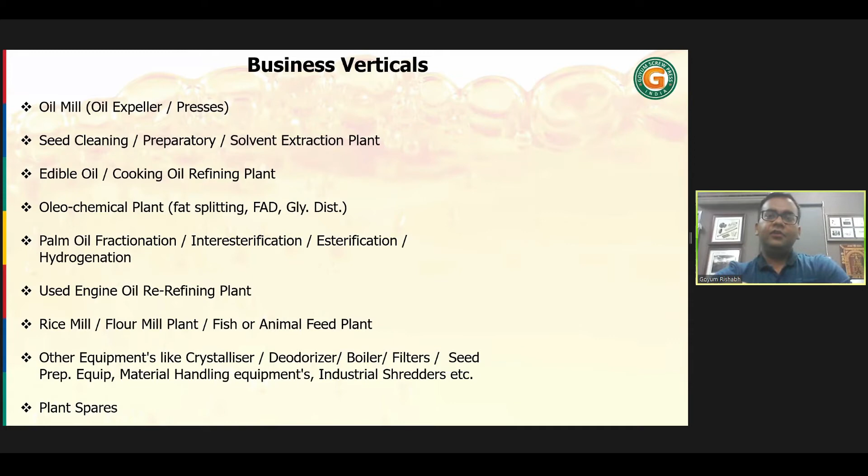Now moving on to the soybean oil extraction process particularly. This is some detailed literature on soybean. It is, as we all know, the oldest cultivated plant in the world, and people have been using it for 4,000 years. It's a high value material for animal feed and for human food production. It contains 42% protein and 25% oil.

Soya needs special processing. Most companies in India are good at processing cottonseed oil, sunflower, or groundnut. But soya needs special processing, the reason being it has anti-nutrients.

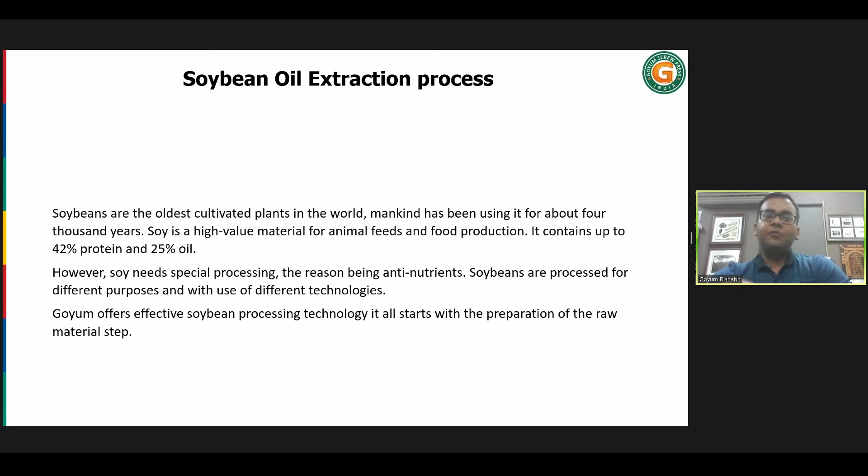Soybeans are processed for different purposes and with use of different equipment. Goyum from India offers effective solutions for soybean processing, and it all starts with the preparation of raw material. So moving on to the process, soybean dehulling.

We provide soybean dehullers. The cleaned soybeans, which are removed from any kind of impurities and dried up to 8% levels, are fed into the dehullers. Here, soybeans are compressed between the first pair of rollers, and as a result, the shells burst and the soya kernels break up into several parts.

The mixture of soya kernels and hulls moves to the transportation system and air separator. Soya shells are lighter in specific weight, so when the airflow moves, the husk moves up and passes through the cyclone. This process reduces the amount of fiber and increases the fraction of protein mass and improves the oil yield. The soybean kernels are then discharged from the air separator and fed into the extruder. Dehulling is done to increase the protein content in the oiled cake, also known as de-oiled cake (DOC).

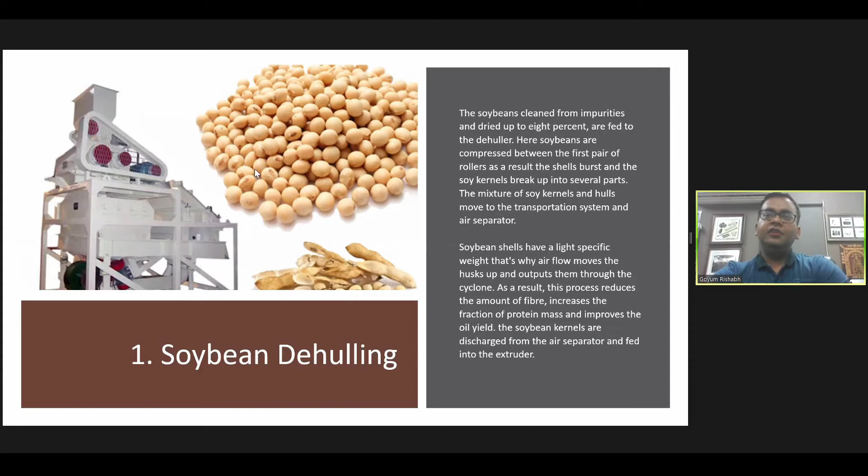After the dehulling process, the processed soya is then put into the extruder. We are one of the few companies in India which produce a complete soybean processing line. We make dehullers, extruders, presses, and the cake cooler as well. I'll explain in detail about the other two equipment.

After the soybean is processed from the dehuller, it goes to the extruder. The feedstock is conveyed forward by the screw inside the extruder barrel. Due to the high shear, it is then compressed, mixed, and heated. The soya is processed in less than 30 seconds under great pressure and high temperature.

Any harmful substances present are destroyed in this process, as the temperature inside the chamber or barrel is 130 to 140 degrees Celsius. At the same time, protein and fat do not lose their properties due to the short cooking time of the product. Our extruders are based on the dry extrusion method.

The heat is developed by friction, and what we have now is a full fat soy meal with the help of a screw feeder. Then this feed is fed into the mechanical oil press.

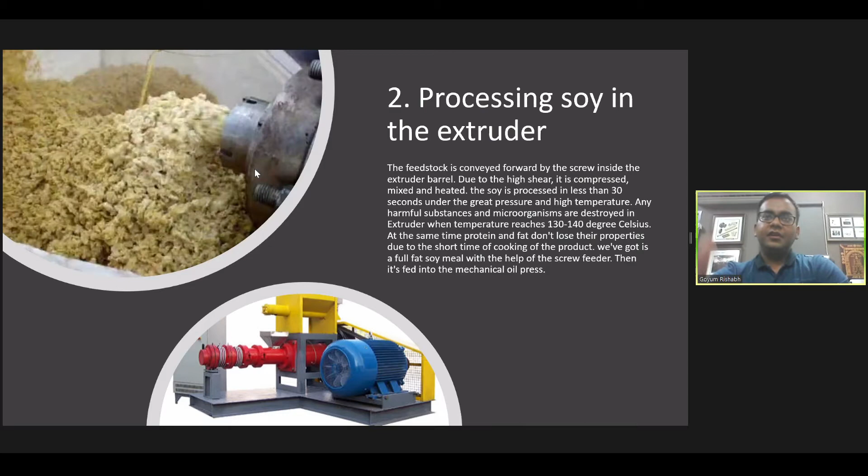I would like to particularly focus that our machines are probably the only company machines from India, or you can say Southeast Asia, which can process soybean and give world-class results acceptable for the world market. Our machines are performing very well in India as well as in sub-Saharan Africa.

So the mechanical oil extraction in the oil process is the third point. The full fat soya meal is moved along the press cage and is squeezed and pressed. Due to this high pressure, the oil seeps out through the press cage gaps and is gathered into the oil reservoir below. What we get is a pressed cake with an oil content of about 6 to 6.5% and a temperature ranging between 110 to 120 degrees Celsius.

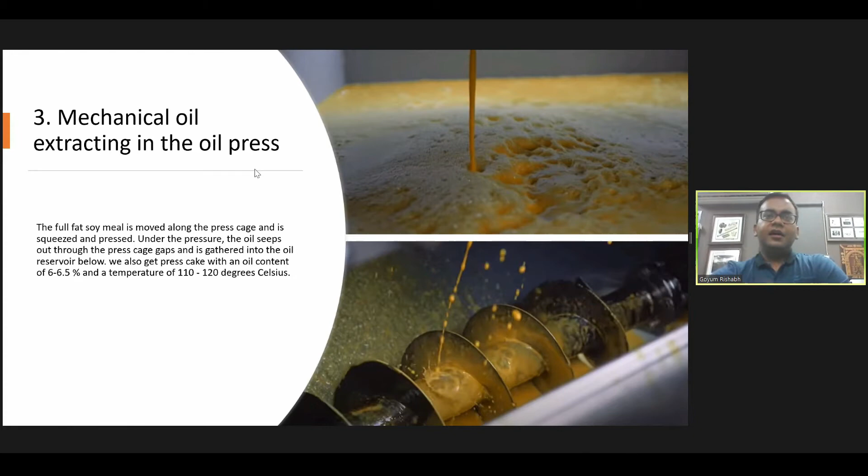So what we have done after extrusion is extracted the edible soya oil present in the soybeans, and got soybean oil cake. After this process, the cooling of the oil cake is an important part.

I want to point out that the trypsin inhibitors are already removed by the extrusion, so there is no need for heating by the dry extrusion. Whereas in case of other oil pressing, like groundnut or sunflower, you need to provide steam before you press the oil seed.

It can't be packed as it is, as the temperature of the oil cake is about 110 to 120 degrees Celsius. So the oil cake, after passing from the hammer mill, is fed into the cooler.

The cooler tumbler rotates and stirs the oil cake down to the discharge section. The fan creates a flow of air through the soya oil cake. Heat exchange occurs between the cold air and the hot soya oil cake. After the cake has been discharged in the cooler, its temperature is roughly 40 to 50 degrees Celsius lower than the temperature it had at the time of feeding.

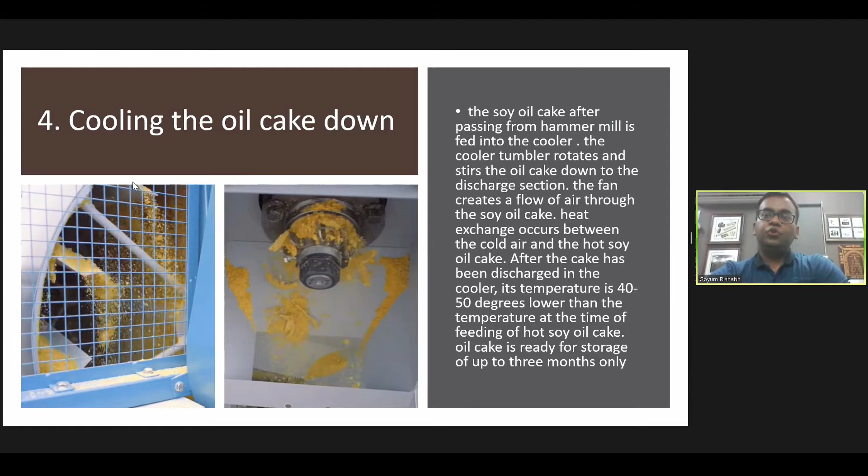So the oil cake, having its temperature at least 40 degrees lower than its feeding temperature, can be stored. Online cooling is also required, for online bagging so that stacking can be done.

So these are the four basic steps which can get the perfect ingredient to be used in the feed industry. Only mechanical pressing can get oil, high protein, and soya cake. In conclusion, let me remind you that high temperature and short time cooking is the key to successful soybean processing. Using our technology, it's available and it's a reliable technology.

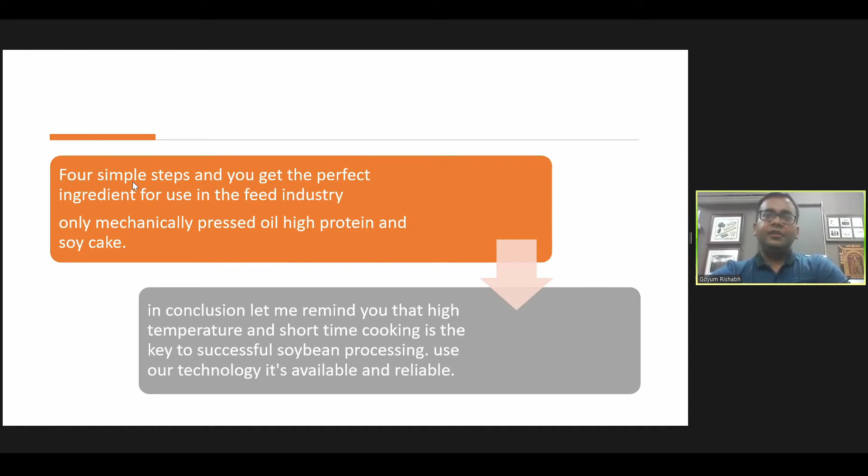So particularly talking about our experience in sub-Saharan Africa, we started our journey in year 2000 from Uganda. In terms of exports, we have been exporting for 20 years now. This is the 20th year of export of our company. So we have had a great experience in sub-Saharan Africa for two decades now. We started with Uganda in 2000, and then subsequently we ventured into Tanzania, Zambia, and Mozambique.

And most of the projects, I remind you, about 30 to 40% of the projects are based on soybean, and the project capacities are not of major scale like 200 tons or 500 tons per day. They are basically medium scale capacities, 50 tons per day or 100 tons per day maximum.

So we're working in all the East Africa region of Tanzania, Zambia, and Mozambique. In North Africa also, we have done turnkey projects in Sudan, Ethiopia, Egypt. In West Africa, we have been working in Burkina Faso, Mali, Senegal, Ivory Coast, Nigeria.

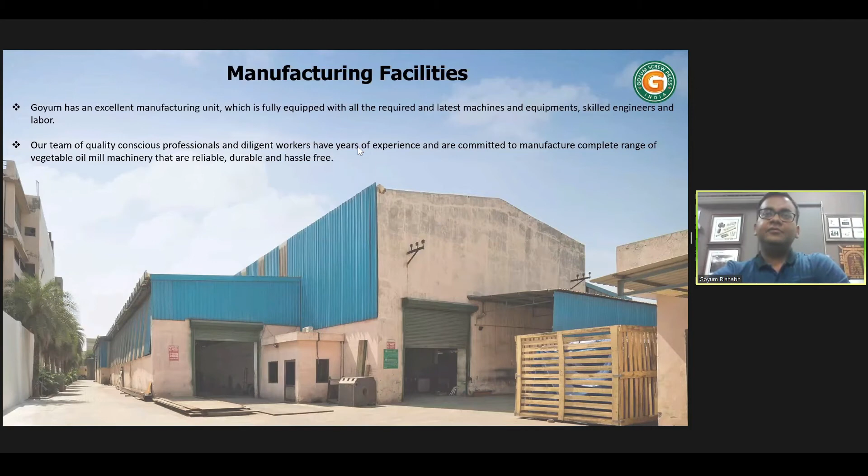So we have a skilled team of engineers who are dedicated to provide good quality equipment, and we have long experience. So the experience helps us to market our product and to provide good after sales service to our customers as well. So these are a few glimpses of our manufacturing facility, which we do here in India.

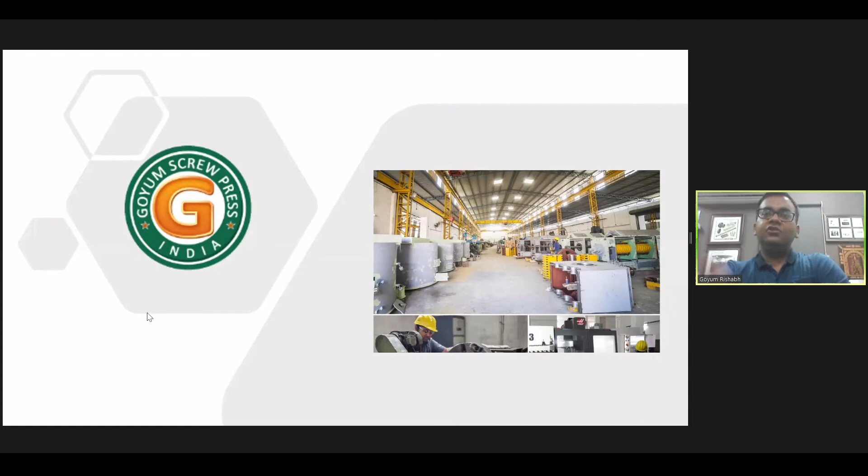These presses on your right of the screen are all for soybean processing. They can work on soybean, sunflower, groundnut, cottonseed, multi-seeds, and palm kernel as well.

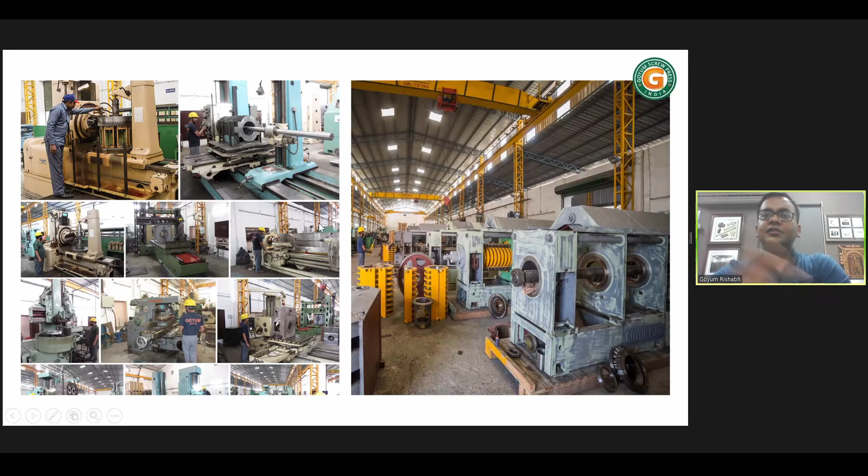These are the manufacturing facility we have. These equipment are for a solvent extraction plant, which we are now doing in Mali. A project—we have grabbed an order from Mali for Shea and soybean. Also, there is a project.

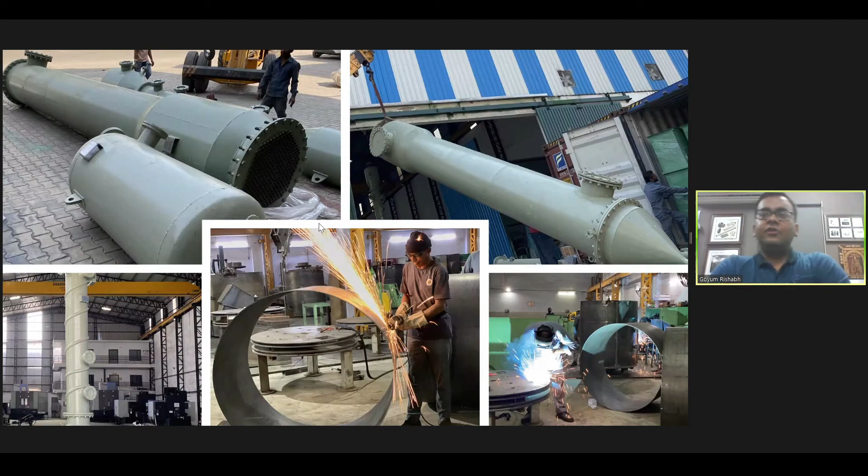These equipments are also for soybean, so refinery and solvent, which we are doing in Kano now for Nigeria. So there's a growing demand in North Africa as well as Western Africa.

Sub-Saharan Africa—my personal point is that due to this COVID-19 pandemic, more and more economies, more and more businessmen are now focusing on self-sufficiency rather than being dependent on imports. More and more businessmen and governments are focusing on how they can make themselves self-sustainable.

So we are now getting inquiries from people who were earlier importing soybean oil or sunflower oil from Ukraine, Brazil, or Argentina, and now they're looking into venturing and putting their own factories for edible oil processing. So at least one good thing I can say from the COVID-19 pandemic is that businessmen are thinking inwards, trying to integrate themselves rather than being dependent on imports.

That's why we feel companies like ours have a good opportunity to work in sub-Saharan Africa. We have a long experience there. We have a good team of professionals there who are working tirelessly, and that helps us to market our equipments as well.

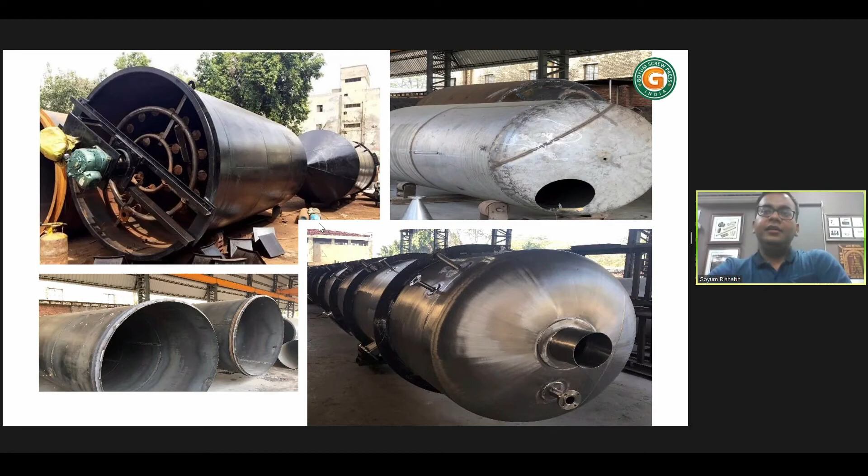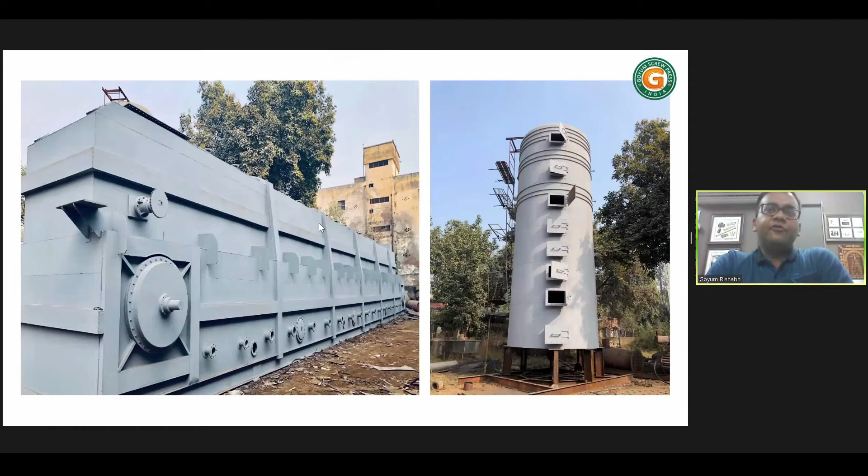These are again some photographs of our equipment getting ready in our factory. These are some of the technological highlights, and we focus on providing maximum efficiency.

Luckily we are in Punjab, and we do not have any labor issues or any kind of these issues, which allows us to work full time, 24 hours a day. We are working in double shift, 7 days a week. So we are quite efficient, which helps us to provide all the equipments in a stipulated time.

What happens in sub-Saharan Africa particularly is delays happen because of bureaucracy and red tape. To counter that, we have a hugely efficient team in India who make sure that whatever we commit to our customers in Africa, we deliver on time.

Our equipments also consume lesser electricity, so the utility consumption is reduced, and they provide better performance on the reduced utility. Our process costs are also reduced because of this, and we are using advanced technology, which helps us reduce the downtime as well.

I would like to give you an example: if a competitor company is selling a machine in sub-Saharan Africa, the shelf life of the parts is like 1,000 hours, whereas in our case, the same part lasts for 5,000 hours. So you're looking at 5 times more time limit. You can run the machine for 5,000 hours without any stoppage or breakdown, and it reduces your downtime and increases your productivity.

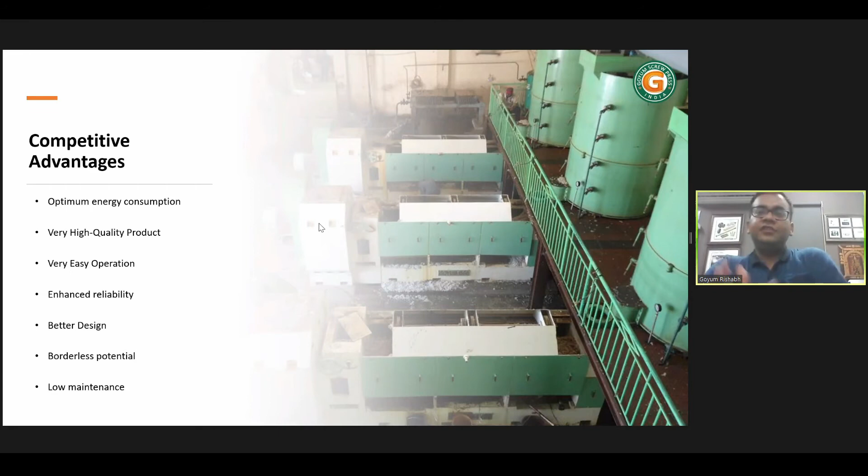These are the photographs of some of the projects we have done. As you know, India is also a huge soybean producing state, so we have done a complete soybean edible oil extraction plant of 400 tons per day.

It is operational in India and working very nicely here. The demand for soybean oil processing previously, 3 years back, it was all solvent extraction. But due to the American and Chinese trade war and the tariffs, it has led to increasing demand for soybean cake in Europe, Canada and North America. So Indian processors, Indian solvent extraction companies, are now putting their own mechanical extraction projects. They are scrapping the solvent plants and putting mechanical extraction processes, and whatever cake comes out is being exported from India to Europe and North America.

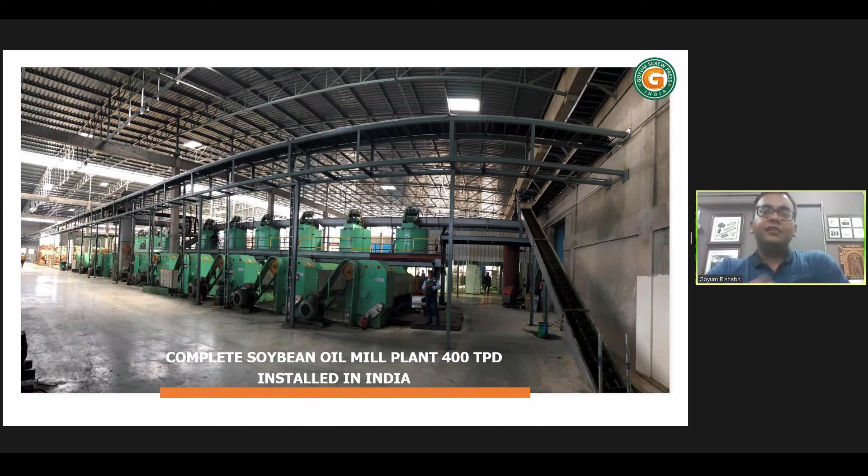That is what has helped us, and similarly this has helped us in sub-Saharan Africa as well. The demand for soya cake from sub-Saharan Africa is for feed. So many of our customers in West Africa and North Africa are using this facility to export equipment and export soybean cake. These are our soybean oil process machines abroad.

We have done in USA as well, in Nebraska, and we have done in Australia also, New South Wales, just on the outskirts of Sydney. We have done 2 projects there.

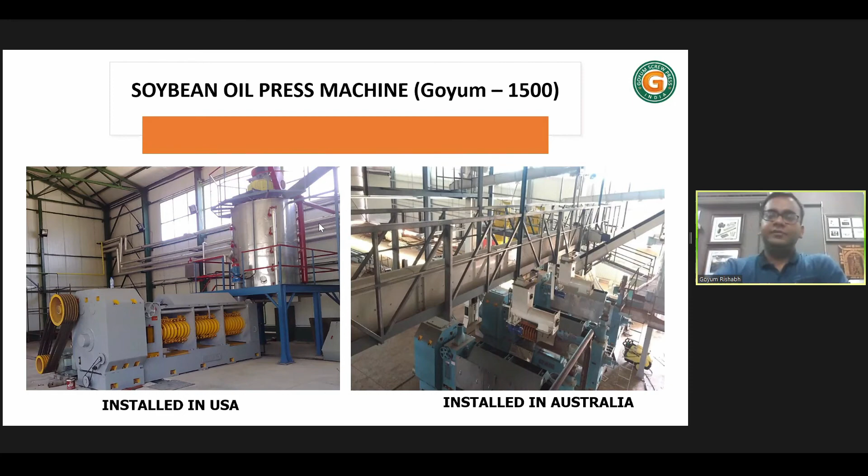Soybean solvent extraction - we have also done projects for soybean solvent extraction in the past, and currently we are doing more. These are some of the pictures of the projects we have done in Africa, and on the right, the picture we have done in India. The projects are under installation.

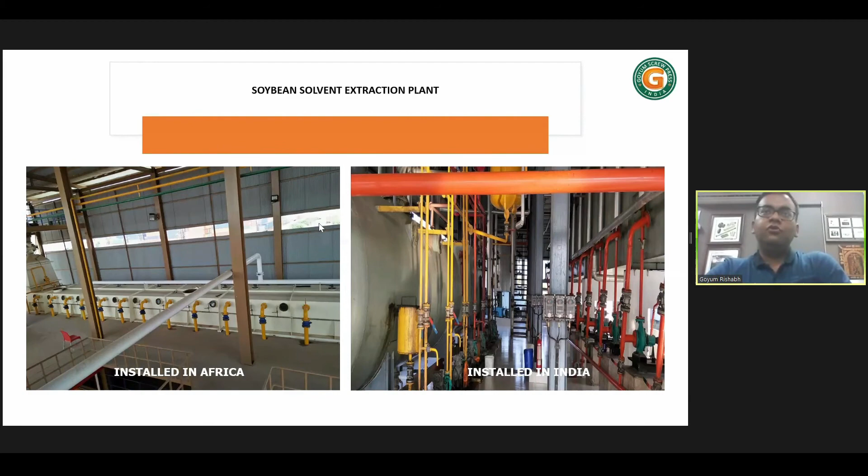As I told you, because of the COVID-19 pandemic, more and more businessmen and business houses are moving towards manufacturing to integrate their supply chain, backward integration. So we have got good orders for extraction, solvent extraction, as well as refinery and mechanical oil pressing. We are currently doing a project in Kano, Nigeria, and we are doing one in Mali, sub-Saharan Africa. So the order book is quite full.

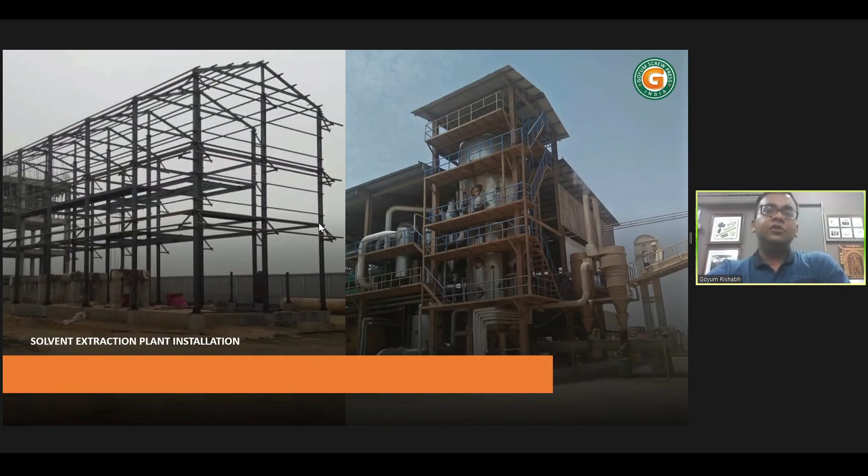The refinery installation is also going on in Tanzania. In Dar es Salaam, we are doing a soybean oil refinery. It is also under operation.

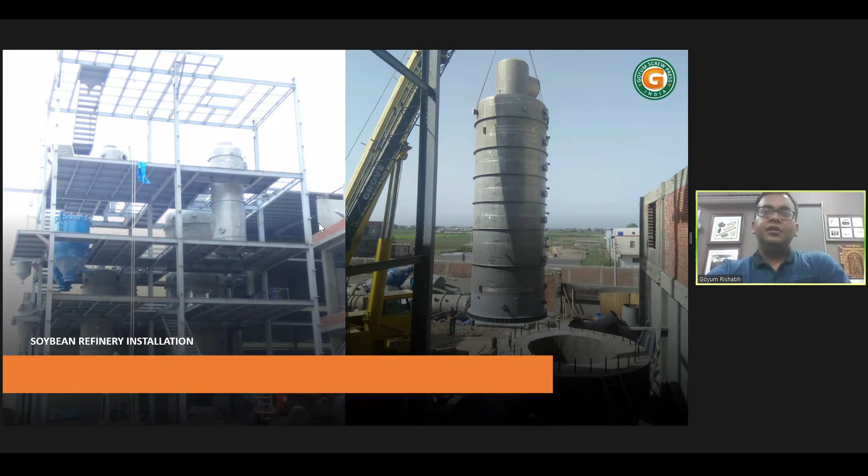These are a few photographs of the feed factories. We have done a project in Uganda recently for a company, and they are working on fish feed and animal feed. They are using soybean cake, and it's a 10 ton per hour capacity plant, completely supplied, erected, installed, and designed by our company. It's a complete turnkey project, very nicely installed.

They are even planning to make enhancements to this line, so we are in discussion with them. This is also a project done by our company in Uganda.

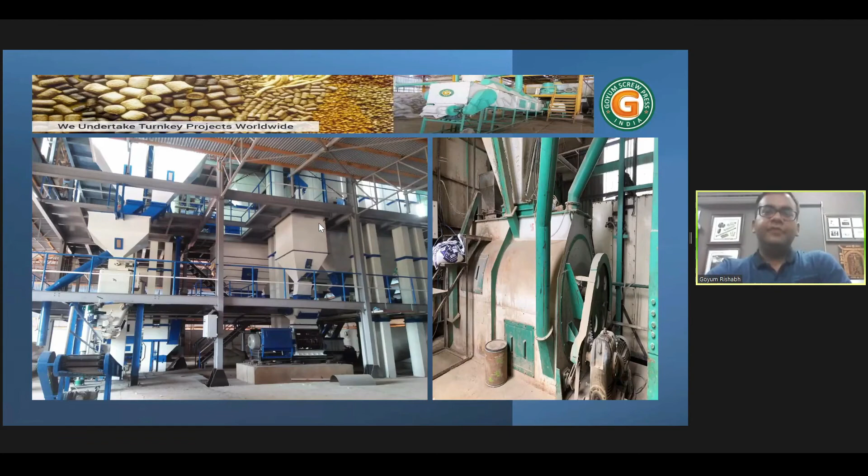These are the details of the project. We are totally based in Ludhiana, which is called the Manchester of India, so the manufacturing here is good and there are a lot of companies and professional brains here. We have about 4 different units in Ludhiana, and an area of about 30,000 square meters covered area, where we have all these 4 manufacturing facilities.

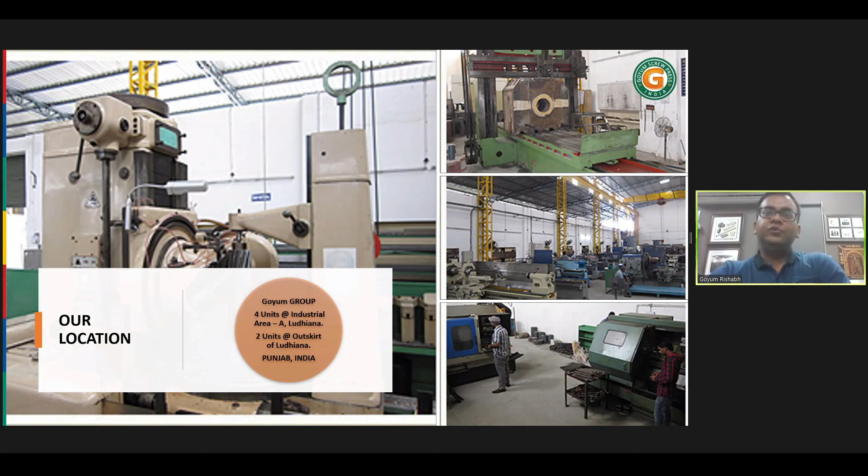So I would like to introduce my colleague, Mr. Jeevan Joshi. He is an expert in oil refining and solvent extraction, so he will share some notes with you on the solvent extraction process, which we have done in Africa, particularly in sub-Saharan Africa.

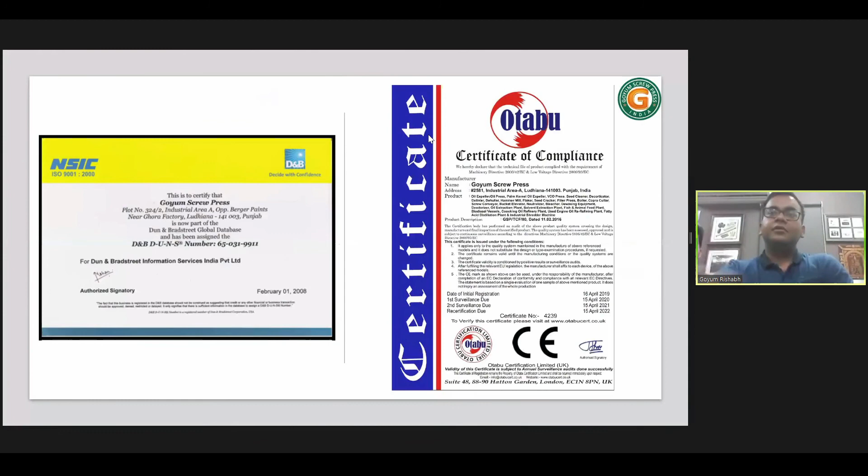So here I would like to come back to our presentation slide of the soybean oil extraction with turnkey solutions. When we are talking about turnkey solutions, it starts from the soybean intake inside the factory. When the soybean is coming inside the factory, the first and foremost thing is to get the proper intake and to have a very proper pre-cleaning section for the soybean. So for choosing the correct machinery for doing the pre-cleaning of the same...

we need to choose the correct equipment with the correct capacities, because the intake is dependent upon the truck size of the particular country, like 35 metric ton is the total truck capacity. So we have to decide in how many hours we are going to do the offloading of the truck, and how many trucks we are going to handle in 1 hour or 2 hours. So the capacities can be decided with respect to that.

Now, the second thing is, once we are done with the pre-cleaning, our next step is to lift the soybean to the storage silos, the grain silos. Now, to choose the optimum grain silo is also an important thing.

Here in India, we have done a partnership with our sister concern companies who are making silos, and in all our Goyum silos we are using zinc-aluminum steel, and we have already installed more than 25 silos until now in various soybean factories.